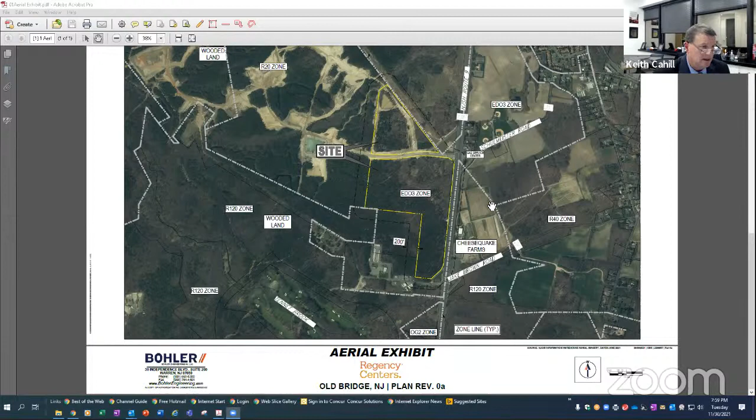To the east of our site is Route 9, and some additional vacant lands further to the east. In general, if I zoom in a little bit, you can see the site is currently vacant. It's treed with mostly evergreen trees.

Just to give you some characteristics of the site itself, the portion we're calling phase 1 is known as block 7101, lot 1, and it's 48.55 acres. This piece of property has approximately 2,200 linear feet of frontage along Route 9 -- 2,200 linear feet, close to a half a mile. We have approximately 1,500 feet of frontage along Schulmeister Road.

And farther to the south, there's actually lands owned by the Board of Ed that buffer Jake Brown Road, but we have an access easement through that land to allow access out to Jake Brown Road. That frontage along Jake Brown Road is approximately 250 feet.

You may be familiar with, there's a jug handle at Jake Brown Road, as well as a jug handle at Schulmeister Road. The last piece of information I'll provide is that we do have wetlands that have been delineated on site. We have a current LOI as of December 2020, so we're in current standing with that.

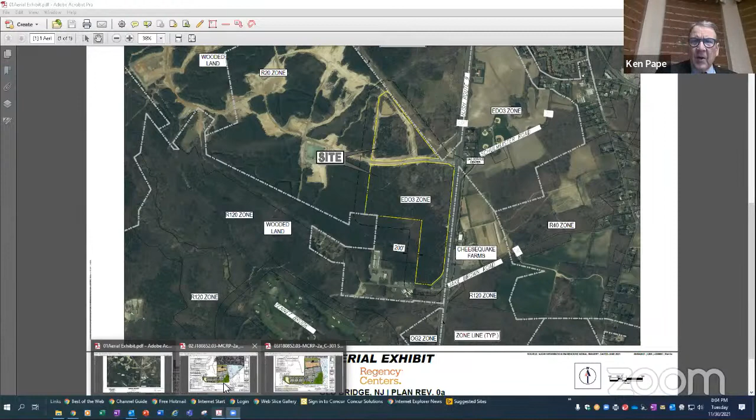Mr. Cahill, I think that was you've located the property and identified the surrounding uses. Could we go to the overall site plan and do an executive overview of the proposed development?

Absolutely. And just as I get into this, I want to let you know your professionals have looked at our drawings. We've had an enormous amount of cooperation in terms of communication back and forth, and they have generated review letters that we've had a chance to review and have some dialogue back and forth. So my presentation, I hope to pick up some of those sound bites. It is a lengthy letter. This is a very large project, but I really am not concerned with any of the comments being too significant that'll have drastic changes to what is in front of this board this evening.

Along those notes, I want to point out on the DEP side, we also have an NJDOT permit that was executed way back when. The improvements related to Schulmeister Road, a right-in, right-out driveway along Route 9, the jug handles along Schulmeister's have been constructed. So not only do we have the permit, but we also actually have constructed the improvements for this development that we're a part of. As I mentioned, the overall approval of Oaks is a part of that.

In addition to that, Middlesex County, we have filed an application. It's pending. We got news today they just need a check and they're going to issue their permit, which is great news. And in line with the soil erosion, Freehold Soil Erosion Conservation District, we have their permit in hand. And lastly, in terms of the Old Bridge MUA, we have sent our drawings in and we have preliminary intensive approvals for both water and sewer as part of this project.

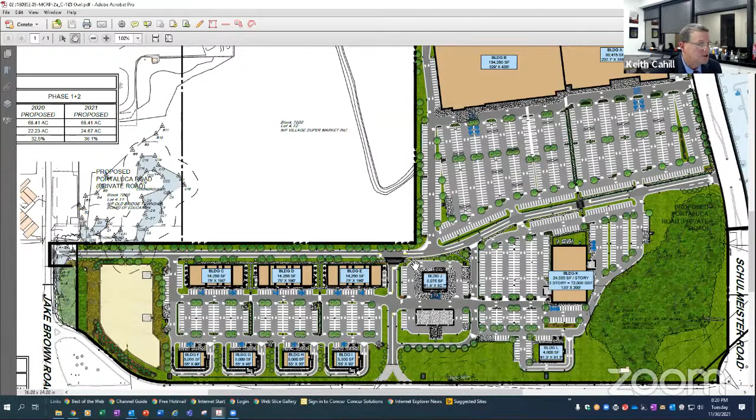Those are raised crosswalks as calming devices, with signage and stopping for pedestrians to get across. You can envision an office environment wanting to get to the grocery store to eat, to the convenience store, or continue across to our shops or other potential fast food. We have a direct access point across our parking lot heading due south from Building K across to the convenience store with gas. We have sidewalks crossing and circulating into the front of the site from and behind our shop buildings, with raised crosswalks again.

There have been additional comments from your professionals with great ideas, adding some more sidewalks and a couple more calming devices for crosswalks. We've had crosswalks connecting buildings C, D, and E down to the pad sites F, G, and H, adding some raised crosswalks there for calming devices, which we agree with. Our intent here is to create an environment that's inviting and circulates safely and efficiently for cars as well as pedestrians for the multiple mixed uses.

In regards to a couple other key components that may be overlooked, because it factors into some of the variances we'd be requesting—you'll notice, as I discussed with our stormwater management and drainage before, the big green areas water runs to now. We're going to allow a little bit to go there, but we have two main stormwater management features.

We have Basin 1 down by Jake Brown Road, which is an infiltration sand basin. This has been reviewed by the DEP and their professionals, meets the DEP's requirements for providing water quality for the entire site, as well as meeting its recharge component. You'll also notice to the rear, or west, of our grocer and Building B retailer, we have another large stormwater detention basin. This is hydraulically connected to Basin 1.

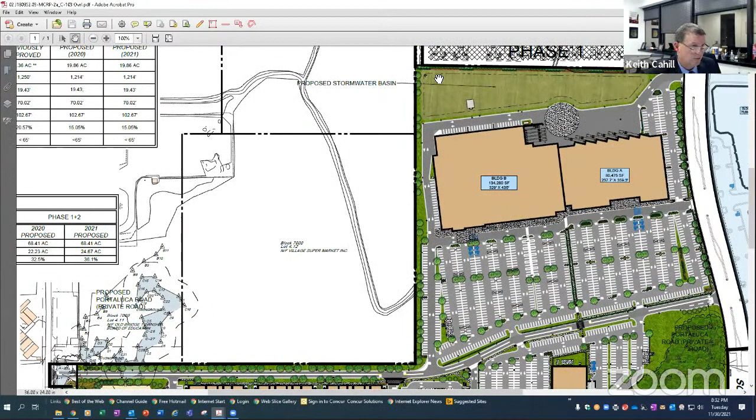We've also added shade trees along our roadways to improve appearances. To give you some numbers on the proposed landscaping: 264 shade trees across 7 species, 51 ornamental trees across 3 species, 178 evergreens mostly along that buffer area across 4 species, and 436 deciduous shrubs across 5 species.

We also have evergreen shrubs, 1,743 throughout our site along the parking lots and parking areas, 1,180 ground cover plants across 3 species, 1,810 perennials throughout the site, and 212 ornamental grasses to fill in and replace what's there. I want to point out these detention basins have certain maintenance requirements and can be difficult, with some slopes along them, but with all that said, we're proposing 5,874 new landscape plant materials throughout this site.

5,874 plantings, 34 different species, including trees, shrubs, and plants throughout the site. I think we've done a very tasteful job.

We do have some waivers that your professionals have pointed out. I'll point out, due to spatial areas along Schulmeister, again along the 10-foot area, right at our driveway, created waivers. They were previously granted or at least contemplated because we did not get any closer to Schulmeister, we did not get any closer to the residents, we're only getting further. So the waivers associated with that, we're going to respectfully be requesting.

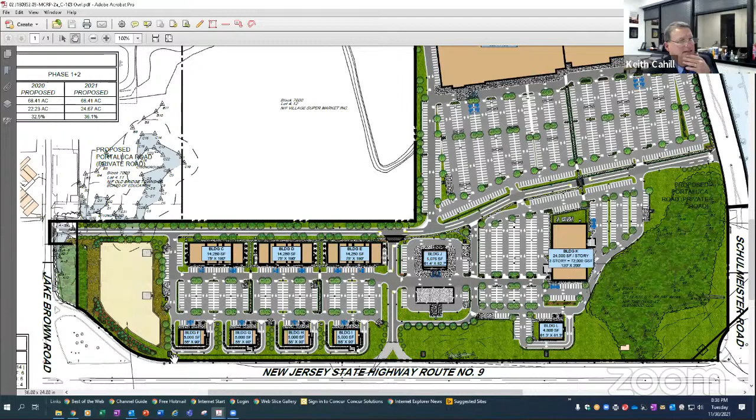The last 2 monument signs are located along Schulmeister. Because we are a corner lot, we are allowed to have a primary sign and a secondary sign. So we have one at the intersection of Portaluca. This sign is in the same character, materials, and look as the other signs, the same height, 15'6", and the same area as the secondary signs, 167 square feet.

The second sign on Schulmeister is just prior to, or to the east of, the entrance in front of the ShopRite. That sign, again, is the same size as those other secondary signs.

The only delta here is that it isn't set back 20 feet from the roadway, it's set back about 13, and that's because it's in an island that is smaller than what we have down by Portaluca. So it's not any closer, and the feel for it would be fine. I think it provides visibility to the traveling public to access the site in the appropriate locations so that our circulation operates safely and efficiently. With all that being said, I think the only other thing I haven't mentioned is lighting.

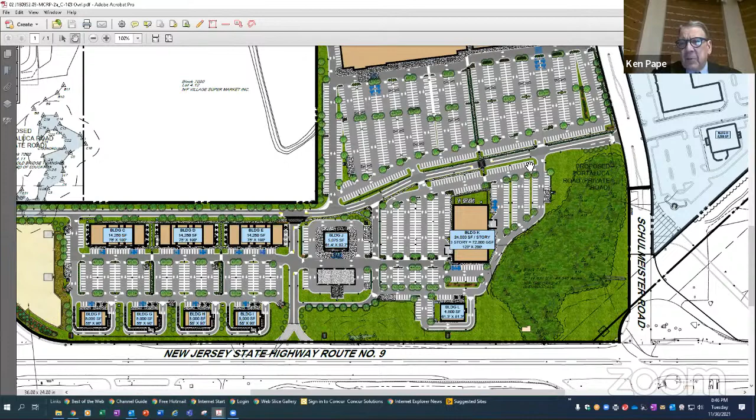I think although Henry Ney will come with considerable more depth on the presentation, I think it's important to point out how the parking standards have changed over the past 15 plus years, but that the ITE standards, which seem to be more current and more real, were applied in the staff's analysis. I would ask if you could comment on that, and if you could join with them in saying your opinion that the ITE standards are the appropriate standards for the board to be considering this evening.

Certainly. And I'll tell you, in regards to that, if you refer to page 12, item 3 from your professionals' review letter, there's probably a page and a half, almost 2 pages of information on this, if not more. And the key there, as I mentioned, following the prior approval of 5 per 1,000, that's what we came in with. The concern of the use of a medical office building needing a higher demand of 1 space per 150 square feet generated a higher number of parking stalls.

And what I'll say again, a fast food use, half of these buildings up along Route 9 in terms of square footage would be designated as a tenant as fast food. The criteria from the ordinance of 1983 was 1 space for 30 square feet, which is, with all due respect, an archaic evaluation today when it comes to what percentage of people go through drive-throughs for fast food versus using it.

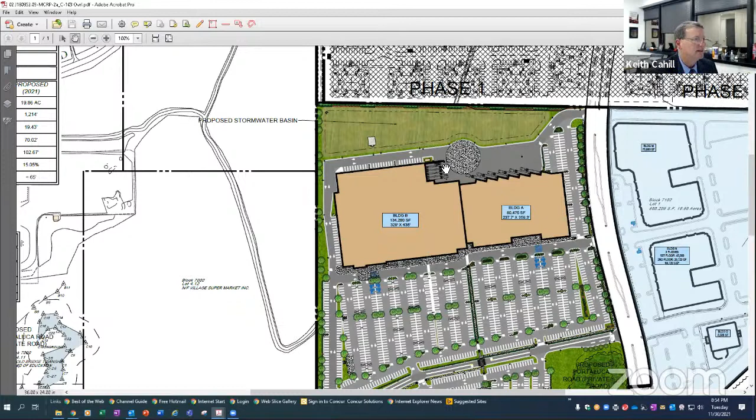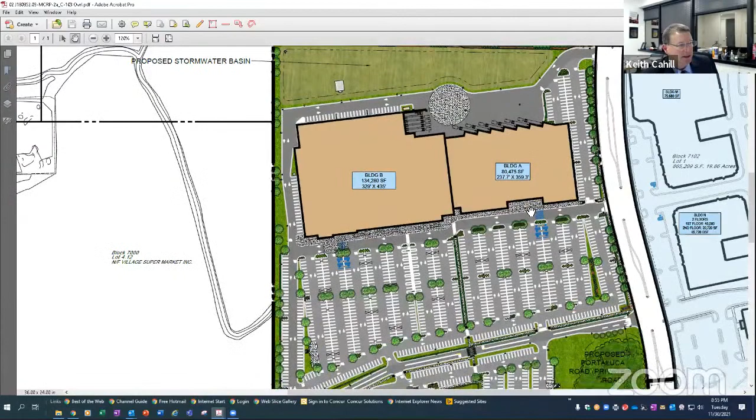In terms of deliveries, you'll see we spent a lot of time laying this out. I'll zoom in a little bit further here to show how this operates. You can see we have turn lanes to allow our trucks to come into the back. This gray area is a concrete turnaround. Our intention is to have all of our trucks delivering to buildings A and B come in off of Schulmeister, enter our driveway closest to the west, circulate here, load, unload, exit the same driveway back to Route 9. There's no need to go anywhere else. Under redundancy, you'll notice we have designed larger radii in our parking lot in an area that could get us out to Route 9 through our right in, right out driveway.

It's our intention that it's redundant, period, end of story. If there is a problem or something wrong with Portaluca for whatever reason, and you have tractor trailers coming on a schedule, you have a backup plan. But the operation is going to take it off of Schulmeister into the back of the site, back to Schulmeister, back to Route 9, traffic signal controlled, a perfect scenario with turn lanes available. The number of trucks for the grocery, including frozen and other vehicles that would use the loading areas back there, up to 38 per day could possibly be back there. You'll notice we have 6 loading zones in the back, spreading that over the time.

Again, not a concern with the numbers. Adding to the 5 loading spaces in the back of building B, a retail facility typically has less because the grocery store has a higher number. At most on the retail side, there's also smaller trucks that may come in and out of the back, 18 per day. I spread that over the hours of operation, and even some outside of those hours. Not a concern.

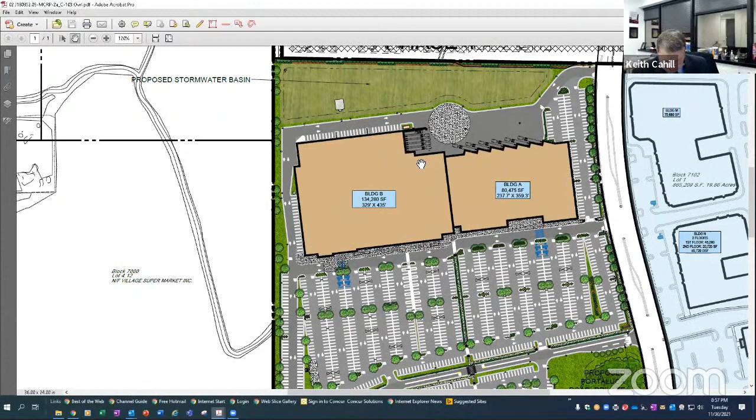In regards to trash, there's trash in the back as well. The compactors are picked up typically 2 to 3 times a day. There's balers for the cardboard for the bigger retail, picked up 2 to 3 times a week. All of that operation is pulled away from the residents, using an in and out system that works, with a backup plan if necessary. I think it operates very well as proposed.

In terms of the operations of the medical office building, building K, hours of operation are 7 a.m. to 7 p.m. Monday through Friday. They sometimes go into Saturday and Sunday, 9 a.m. to 2 p.m., with less people and appointments. Typically during the week at peak, 150 employees, and they have a turnover of visitors where they could see up to about 70 people in a 2-hour window over the course of their operating hours. A high percentage of visitors are scheduled appointments.

If you do all that math, having over 370 odd spaces in this area, there's no concern in terms of having the employees there. Even with an overlap of 70 plus 70, we still have a surplus. I think that works very well.

I will admit I did a very poor job showing the service area for this building, and I take full blame for that. The pads along the west side of the building have 3 things there. This building does need an emergency generator. It has trash collection, a transformer, and a service area.

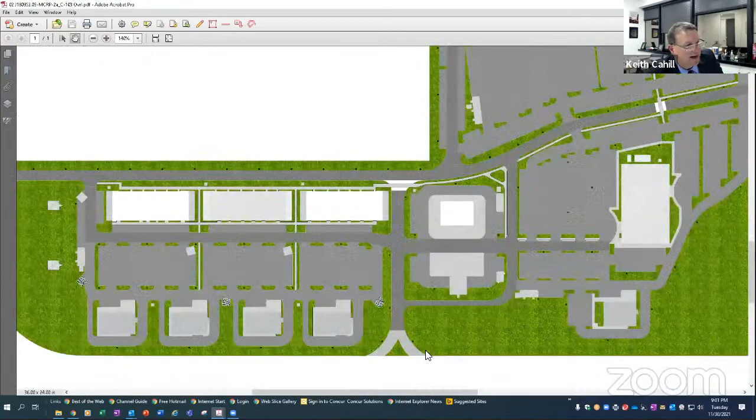As I mentioned, the drive aisles are more than adequate. We have a right-in, right-out driveway immediately off of Route 9. We're anticipating a fuel delivery pulling in and circulating around at a minimum of once a day. They will offload on the right-hand side. The dimensions between the islands are 30 feet, the dispensers 30 feet. All of that operates with clear lines for cars to operate, and when the tractor trailer is fueling, it does not inhibit operations at all.

There are adequate safe distances between the canopy and the store itself. Again, cars being able to pull out, no problem.

The delivery vehicles for a facility like this go to the rear masonry enclosure, which has a dumpster and a shed housing equipment that keeps the yard clean, as well as a compactor. You'll see loading zones on either side. Smaller vehicles can come in off the right side to pick up from the compactor or trash. On the left, or south side, that loading zone is adequate enough, with a 24-foot drive aisle and 15-foot lane for loading.

Store deliveries, between soda, milk, and dairy, typical grocery stuff coming in and out, run 1 to 2 per day for the store itself, up to 15 a week. They also take anywhere up to 24 in a week's period, 5 days a week, coming in and out of the front of the store with smaller box trucks and things of that nature. Again, no concern with these dimensions, it's industry standard for this type of operation. No concerns with loading, no concerns with trash.

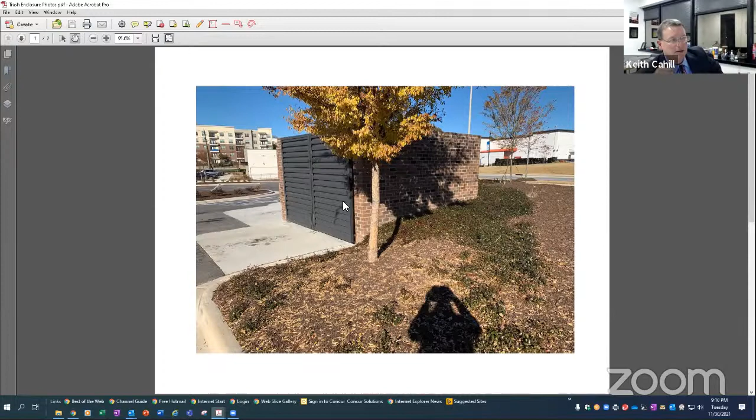Ken, can you confirm you see that? Yes. Okay, so this is the Raleigh facility, in the parking lot with landscaping around it. You can see it's made of brick material and the doors are closed with a metal closure. They're only opened when the trash truck comes, because they've built in man doors that allow access, typically in the rear, so it won't be a problem operating and won't be seen.

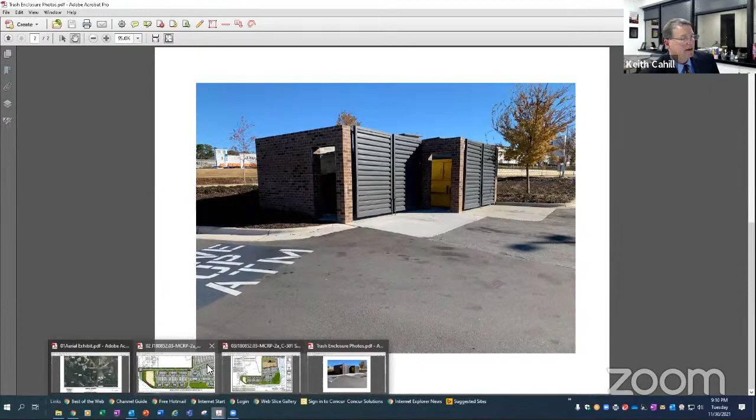Look at the height, in excess of 8 feet. I did not have this detail shown on my site plans—I apologize to your professionals and the board. I will make sure this detail is shown, but this is how Regency and our office feel we've planned this development out in a way that will function and be aesthetically pleasing, serving the needs of its tenants, its customers, and Old Bridge.

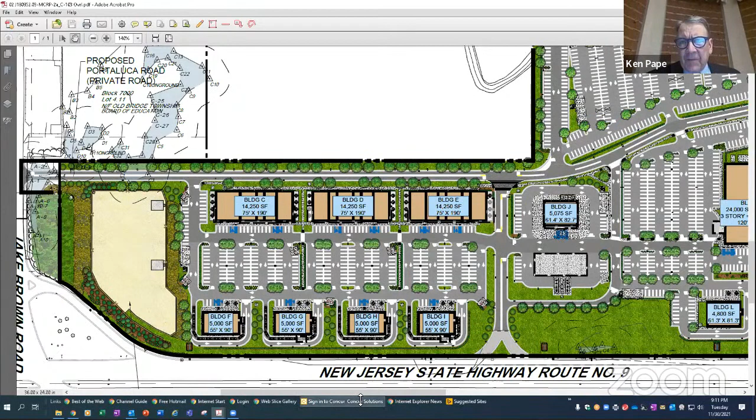Keith, I think we're coming to a conclusion of a portion of your testimony. You described the variance relief required for parking and for freestanding signs. You did not provide planner's testimony in support of those variances—you identified them empirically and gave your engineer's perspective on why they were appropriate. I want to say to the board members and board professionals that Mr. Cahill's responsibility regarding variances is to describe them accurately, put the empirical data before you, and share his engineer's perspective. We recognize there's planning testimony that goes with that, and that will come at a later hour.

I'm going to look to you, Mr. Cahill. Have we reached the point where it's appropriate to indicate that we have the reports and that you're familiar with them and prepared to address those comments? Or is there any further direct substantive testimony you'd like to place on the record before we go there?

To the point you mentioned, I need to point out the variances. Just as identified in the reports, which I agree with, in addition to the parking space number, there is a requirement to have an island when 20 plus stalls are in a row. We do have a few areas in the parking field, I'm pointing to a couple of them, where we exceed that. We are respectfully requesting that variance.

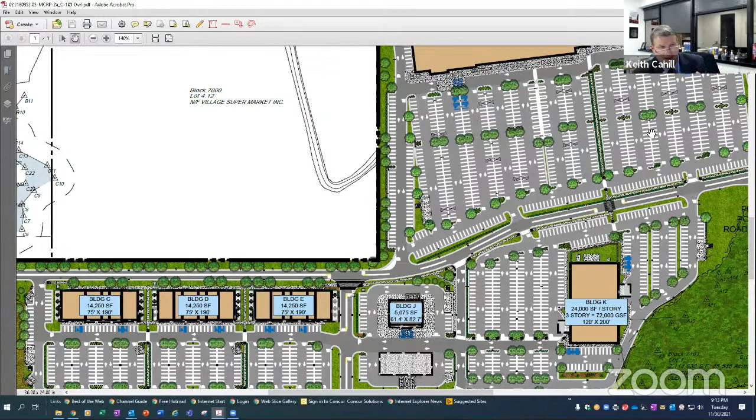There's a requirement to have a 5-foot radius on all curbing. There are some islands throughout the parking lots because of the circuitous angles and locations that deviate under that. Again, in my opinion, I'm just pointing them out. I'm not concerned from a safety or design standpoint. It functions well, I'm not creating tripping hazards. I'm just trying to provide islands that may be in an area with some unique shapes due to the angles there.

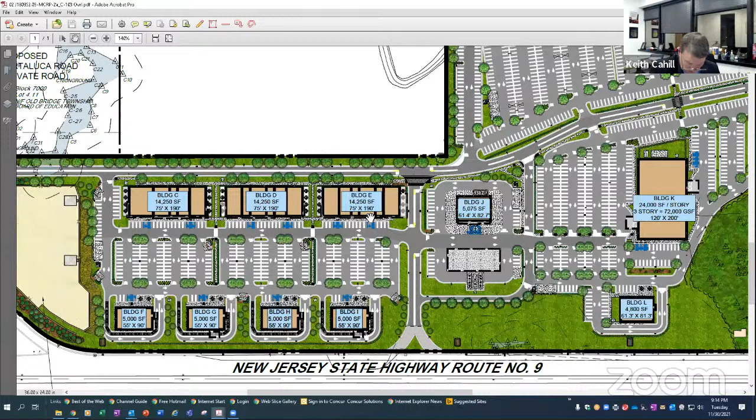And lastly, for the loading requirements, you do have a requirement to have it for each building. You just heard me - I hope it wasn't a rant, but I realized when I was speaking a long time, I probably was ranting. Building C, D, and E technically do not have loading zones where 2 would be required per building. F, G, H, and I did not stripe one either, though they have one that will operate and function like one. I do need a variance in that area because I'm not meeting the number per that building.

It was located, it was commented in the letter that the convenience with gas didn't have a loading zone, but I believe it does. It meets the ordinance, so it does not require one.

Building K, again, I'm going to reserve the right to, when I correct the drawing, see if it meets the definition with your professionals for it to be a loading zone, but there is a service area that meets the needs of that building. So if it's determined it's a variance, I will respectfully request that.

And then again, building L. I believe I've identified all of the variances requested between parking numbers. I identified, I believe, also the signage variances related to the freestanding monument ID signs. I reserve the right that your architect will discuss the building signage - God bless him, he can spend, they're beautiful, but there's a lot of it to discuss. I think that covers the items as required, because the waivers I mentioned for landscaping, I believe I mentioned them all, and our planner will provide the justifications for each one.

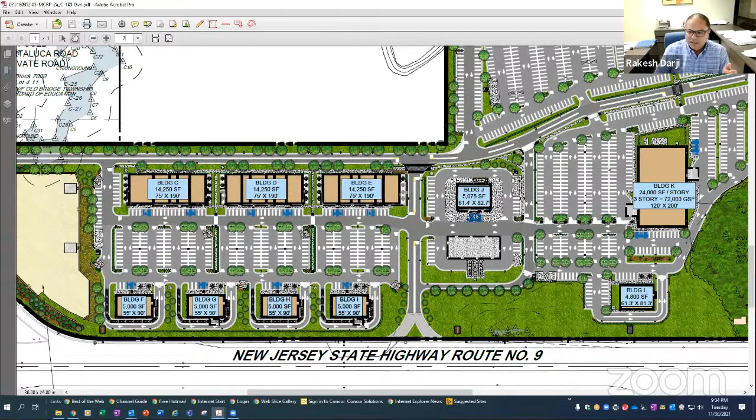One of the questions that we had in our letter, and I'm sort of skipping through - Keith, if you can zoom out a little bit - there's a square shaped property that currently is noted as belonging to Village Supermarkets, which is a future commercial site. And what we requested is that the access to that site be dealt with or accommodated in some way, or at least some discussion be had as far as how the applicant proposes to integrate that site into this development.

Sure, great. Yeah, and that comment was in here and it's on my list, Ken, that I didn't hit. So, yeah, I think the challenge that we have, providing cross access between the sites is not a concern of our client. Locating it today without knowing what's going on that property is tough to do. There's obviously grade change today, there's access points that may make more sense. So could we cover it with, we agree to provide cross-access easement when we see what is being developed next door? Or somehow, I'll let the lawyers figure that one out, but I don't want to say right here we're going to put 15, 20 foot, and then whatever goes on the other side, it makes no sense to put it there, right? So... Yeah, I can appreciate that, and I can also appreciate kicking it to the lawyers too.

So really, I guess what we would be looking for, and again, I'll ask Veena for her input as well, is that should the board act favorably on this application, that there be a condition that the applicant would work with the future developer of that property to integrate that site in with this development.

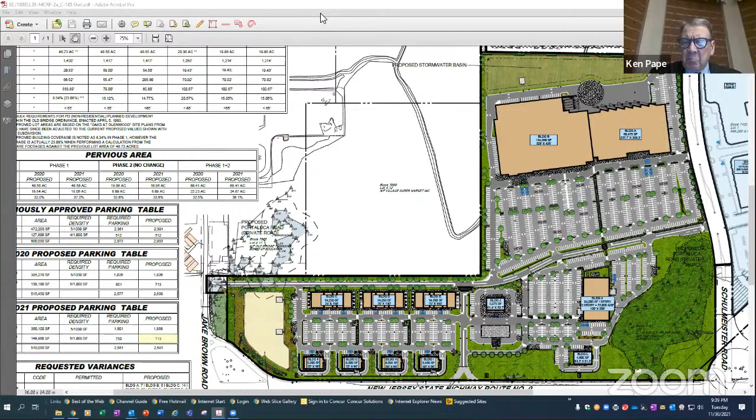So yes, we're aware that that language appears in the developer's agreement. There are some qualifying elements in the actual developer's agreement. I had the opportunity today to talk with the township attorney and Veena about alternative ways of addressing that. We did not reach a conclusion, other than to make a commitment that during the next week we'll engage in dialogue with the township to see if we can come up with something that's mutually agreeable. I think that would be the appropriate place to stop this evening.

We're going to work very hard to make an alternative work. Thank you. So along that same vein, one of the things we discussed with the applicant and their professionals was the existing New Jersey Transit bus stop at the corner of Schulmeister and Route 9. One of the things we're asking is that as part of this application, the applicant work to construct a sidewalk going out to that bus stop that would serve this development and also serve folks who may be walking down Schulmeister to the bus stop.

So we do want to cooperate. We more than want to cooperate. We can't make promises on lands that we do not own or control, but we can make promises to provide the funding for the sidewalk, and where we can install it, we'll install it. We like the idea just as much as you do. We just have to work it out. So we're in agreement that a sidewalk would be beneficial in that area. We just have the legal and ownership issues that we've got to work out.

So I think, correct me if I'm speaking out of turn, but I think that's something we can discuss between now and the next meeting as well, to get a little bit more clarity on what that's going to look like. Yep, we're fine with that.

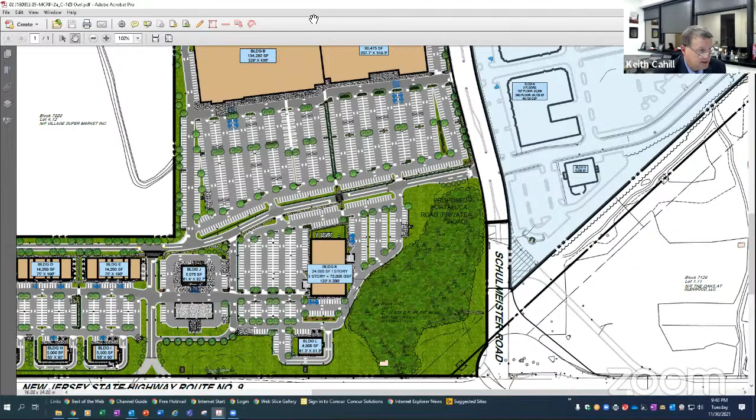Rakesh and Veena, you had mentioned, and I put some testimony on additional sidewalk to get across from Building K, the medical office building, toward and connecting the pad sites F, G, H, and I. You also mentioned some calming devices for crosswalks in that parking lot, and using a treatment for a calming device at the intersection off the right-in, right-out off Route 9 prior to getting up to Portaluca. We're in agreement on that.

And in the same vein, you asked for bike racks located throughout the site. Again, they're easy things that make sense to do, so I want to do that. We did point out we didn't want that sidewalk coming along the one-way road, and I think we all agreed on how we got there, so we do it in the safest location to cross the street. I just want to make sure we're all on the same page, and I can have an exhibit prior to the next meeting to show that if needed.

Veena, I forgot to mention one other thing you brought up, and it relates to signage. You pointed out that on the drive-through uses, when we show drive-through ordering points and directional signs, I thought they were covered under directional signs and no variance would ever be required. You mentioned it could require a variance, and I wanted to let you know, prior to the next meeting, I want to show that so that if it does require a variance in your opinion, I want to ask for it rather than finding out down the road.

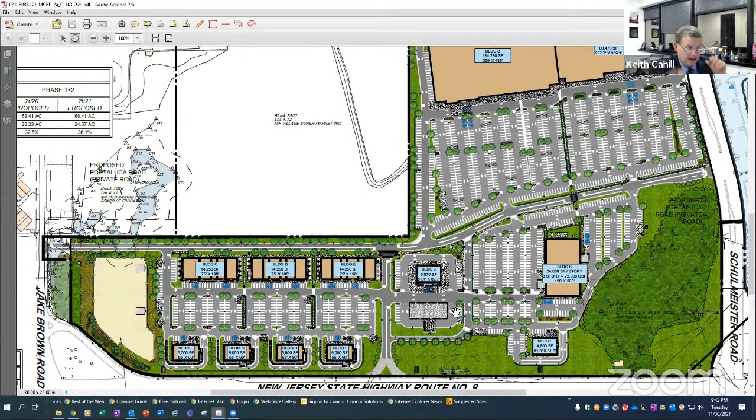And lastly, in the same vein, you mentioned we did not show any signage on the fueling canopy. I want to add that too. If it does require a variance, then I want to ask for that, but I know right now it's not shown. Again, I would show you that prior to the next meeting, so you have time to review it, determine it, and let that be known to the board, whether you're in agreement with it or not.

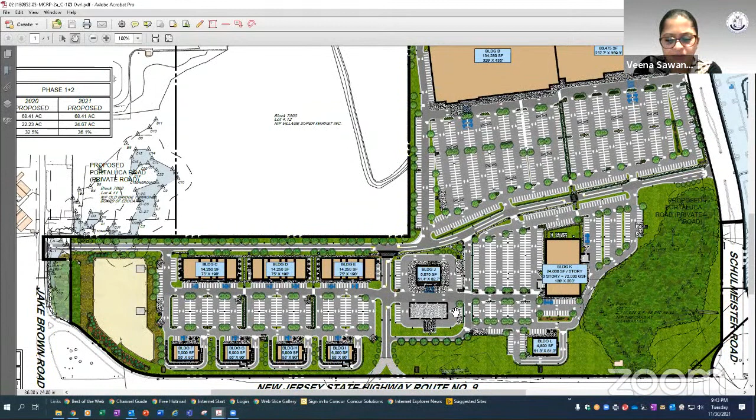Sure. Just to add on to that, board members, there was a lot of discussion between Keith, Rakesh, and myself about pedestrian circulation within the site. We had asked the applicant to add additional sidewalks, especially the connectivity between the parking lot for the medical office and the retail spaces, which is quintessential, because medical office buildings typically close at 5 o'clock or may not be open on weekends.

Now when we talk about shared parking -- and we didn't even get into the whole shared parking concept -- every user or retail use has a different peak time. Retail parking spaces within the complex are mostly used during evening time; that's their peak time, whereas the medical office building is closed then. So the parking required by the medical office frees up during evening hours. If the restaurants or fast food restaurants or the retail development get busier, people will be able to park where the medical office building is. So it's quite important that there's safe pedestrian connection between these uses.

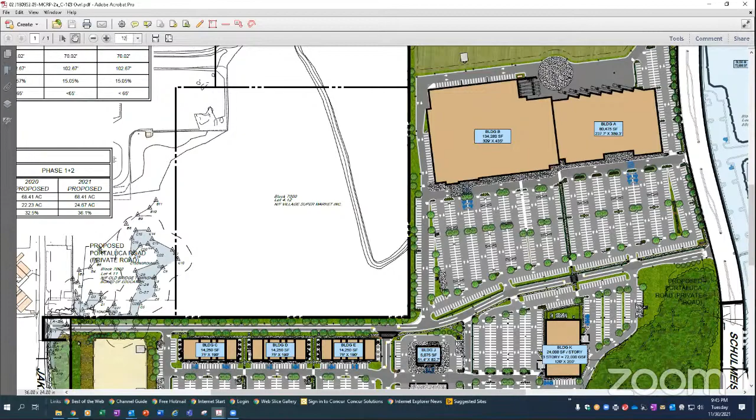So the overall development, the entire Oaks development, is a mixed-use development with residential and commercial, residential being on the rear portion. Sorry, I'm going the wrong way. So I think it's important that there is proper connectivity, and it's a multimodal connectivity.

It's not just pedestrians -- even people during summertime, I would love to bike to the retail store, I would love to bike to the restaurant. So I discussed that maybe that's something they should look at. Between today and the next meeting, Keith has agreed to work with Rakesh and me to find solutions for how we can add that connectivity. They have agreed to add bike racks at multiple locations throughout the development. So those are changes you will notice.

With fast food drive-through restaurants, I've found that the majority of township ordinances do not cover menu board signs, and typically when a fast food restaurant comes in, they have to request a variance for those menu board signs. So I asked Keith to look at some fast food restaurants and what their requirements would be in terms of menu board signs, and request those variances at this point. Obviously he needs more time to research, evaluate, and come up with a proposal. We will work with him, review the signage in advance of the next meeting, so that the necessary variances can be added.

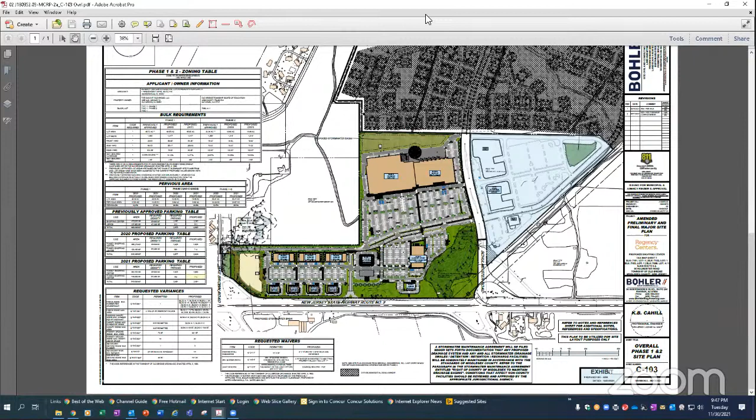Keith, you can go on. Is there anything else that stuck out? Rakesh, do you have anything else? I don't have anything else at this time, Mr. Chairman. Okay, anything from any of the other board professionals before I hand it over to the board members?

Mr. Chairman, we have the fire chief tonight, and we have our forester as well. In addition, I also have Alex Meitzler from Traffic Planning and Design, who's our traffic consultant, online. So I'll ask Alex if he has anything to add at this time.

Okay, in regard to Mr. Cahill's testimony. The applicant's traffic consultant is also going to testify, and I imagine Alex will have some input at that time as well, related to the on-site circulation items. Rakesh, I think you and Veena already hit the items we had discussed earlier this week regarding Mr. Cahill's testimony. Great, thank you.

Okay, any other board professionals regarding Mr. Cahill's testimony? If not, I will hand it over for any questions from the board members themselves.

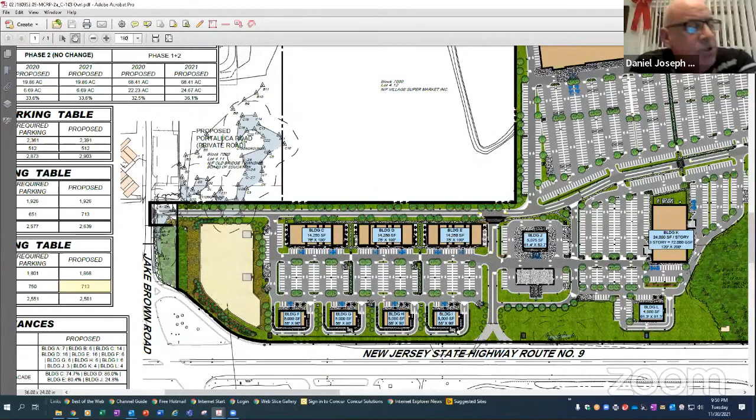If we go towards building G and zoom in, we can see the relationship of building G, the entrance to the drive-through, and the relationship to the adjacent parking directly across from it. From an observation standpoint, it appears to me that if there was a 20-foot adjustment taking the cluster of buildings F through I and moving those four structures south 20 feet, you would then have the ability to directly align with the interconnecting pathway between the parking.

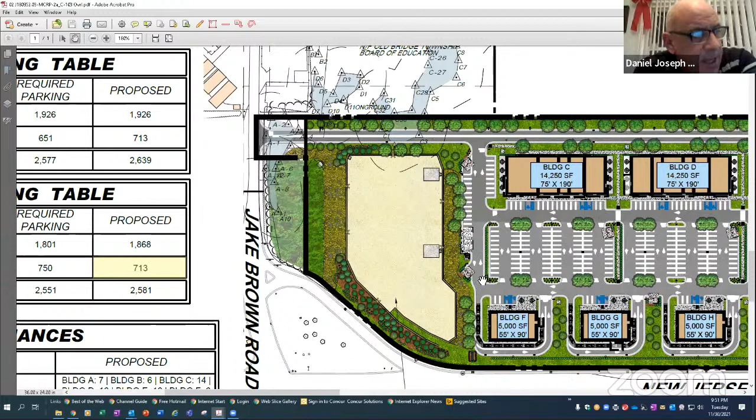What's occurring right now is if you drive down off of 9, you come in, you make the left. If you want to go to building G, you would follow down, turn down, make a left down that parking stall lane. Then to be able to enter, if you took that path, you'd have to make an odd move to get into that drive-through entrance. But if you could envision adjusting it 20 feet south, it would directly align and reduce odd maneuvers for vehicles when they enter or exit.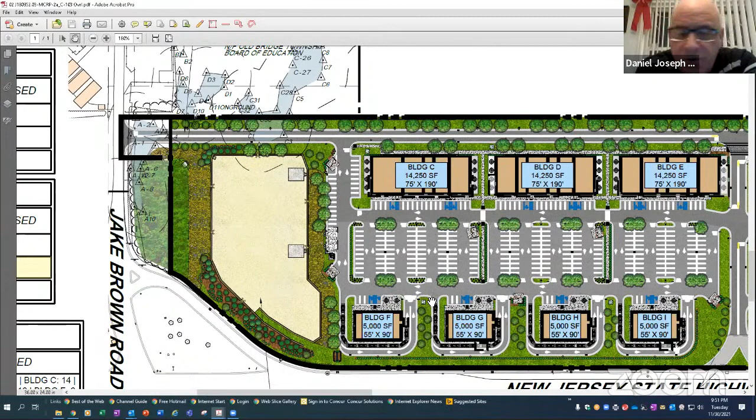I know the intent is when they exit any of these facilities, they would make the right and follow the pathway, make the left, then make another right to exit back onto 9. But the likelihood is that will not occur, and they'll try to get into that second lane to then make the right and leave. So the observation is, unless there's something prohibiting the adjustment 20 feet to the south for the entire cluster, I think it's something you may want to look into. That's one. Second item is, Mr. Renner, can I just address that really quick?

I just have a quick question to bring up a point. But is that traffic pattern discouraging people from driving between those parking lanes and possibly creating accidents with people backing out? Is it encouraging people to loop around specifically to get to those fast food restaurants?

I think that's where the whole discussion comes from right now - what is the likeliness to occur? Anyone going to building G or building H is more tended to drive straight out if possible, then make the right in front of building D to get back, instead of going around the outside. So it may be designed for traffic flow to circulate around the perimeter, but it's more likely vehicles will try to go straight. Right now they can't go straight because they'd hit the barrier for the parking stalls, so more than likely they'll make a slight move into an oncoming traffic lane to enter the drive-through.

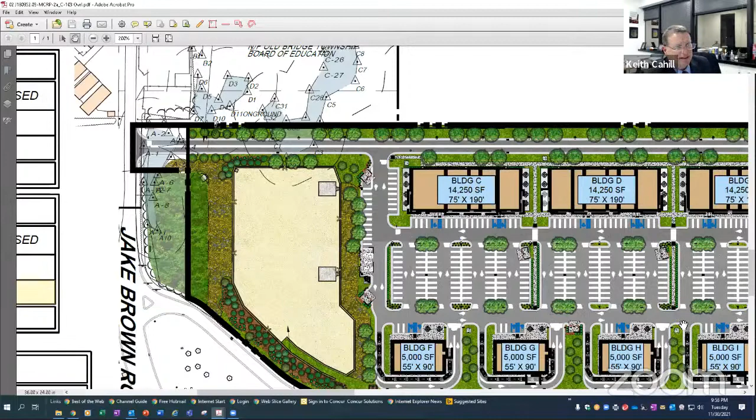Just so we're clear, because moving this is pretty close to alignment - but either way, I got you, we'll take that design just so we're on the same page. We'll take that back and see what we can do to improve that.

Okay, thank you, Mr. Cahill. Mr. Renner, anything else? Thank you. That's all, Mr. Chairman. Okay, sir, thank you, that's it. Do any of the other board members have any questions? I do.

Okay, Mr. Pinck, how are you? Okay, I just have one or two questions.

Are the roads one-way or two-way within the facility? Which roads? Any of the roads you can drive on. Yeah, I see a lot of them are noted with arrows. They're all two-way with the exception of two areas I pointed out. The loops behind the pad sites are one-way circulation in a counterclockwise direction, so the drive-through operates. The only other one-way area is entrance only on this driveway I'm highlighting, closest to the right off of Route 9.

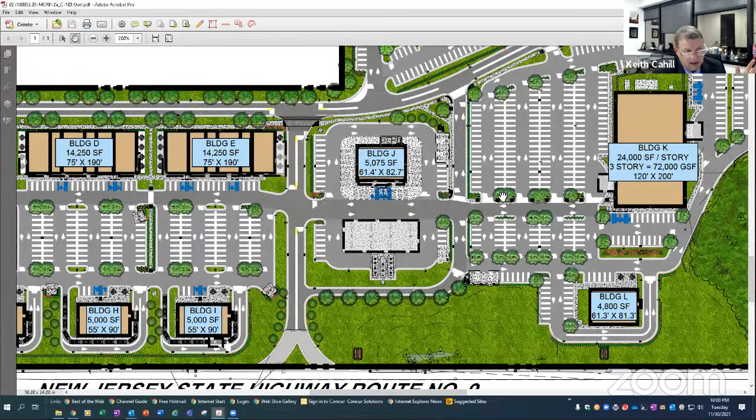The reasoning is, A, we don't want cars exiting here too close to cars coming in, but entering here provides an option for people going to building K who don't need to come up to this intersection or cut through the convenience store with gas. They can bypass that and come straight off the highway. I compare it to a shopping center in my town where they provide an extra cut-in for the Wegmans instead of going through the main spot and circulating through multiple intersections. This spot operates differently given the number of employees and visitors during the day, so you can shortcut it.

This is the one-way in, and then it becomes a two-way aisle. Everywhere else is essentially a two-way aisle.

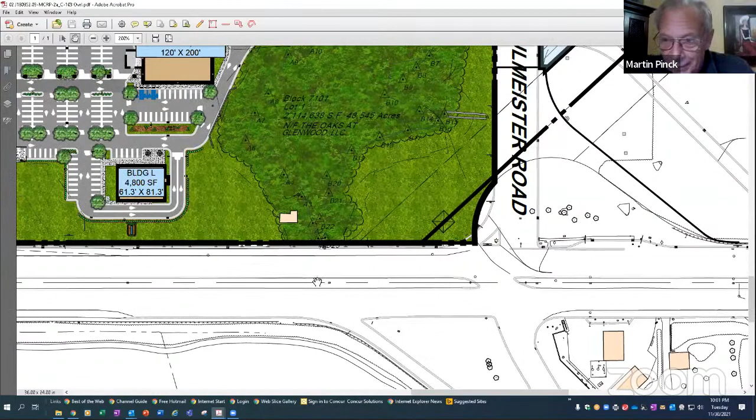Based on what you're saying, is there any limit on the size of trucks coming in? Or is there a separate truck entrance, and if so, is there a size limit you must be over to use it? Also, what about double parking on the main streets? Even though cars aren't parked there, with trucks stopping for a couple minutes, is there enough room for someone to go around them, or will that build up more traffic trying to get past these double-parked trucks?

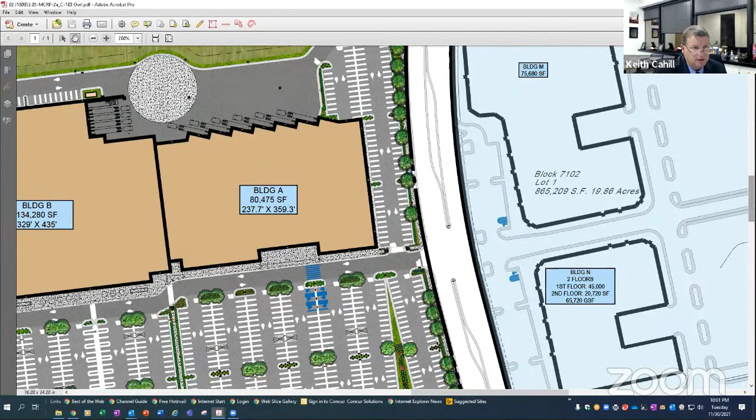So let me make sure I understand clearly - I apologize if I didn't make it clear. The size of vehicles delivering to building A and building B, the grocer and retail facility, are typically WB67s, the largest vehicle along the road. It's designed to come in and out of this driveway, and there's adequate space for those movements to occur.

But that's going into the driveway - what about getting to the driveway? They're riding on the main roads of the development. They have to get to that back area unless there's a separate entrance just for trucks over a certain size going to the back.

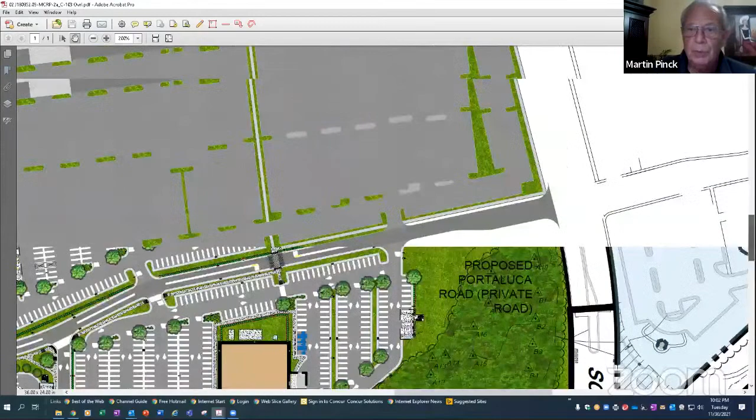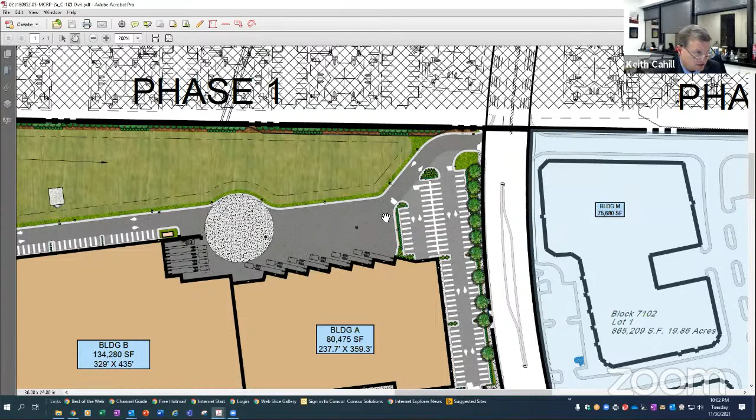Schulmeister Road comes off of Route 9. Tractor trailers can utilize Route 9, come down Schulmeister, and use a left turn lane to get into the service area in the back. There are recommendations to put up signage - truck entrance, employees only - and we agree with that. But this is where the deliveries, the largest vehicles on this shopping center, the WB67s, will enter and exit and get back to Route 9.

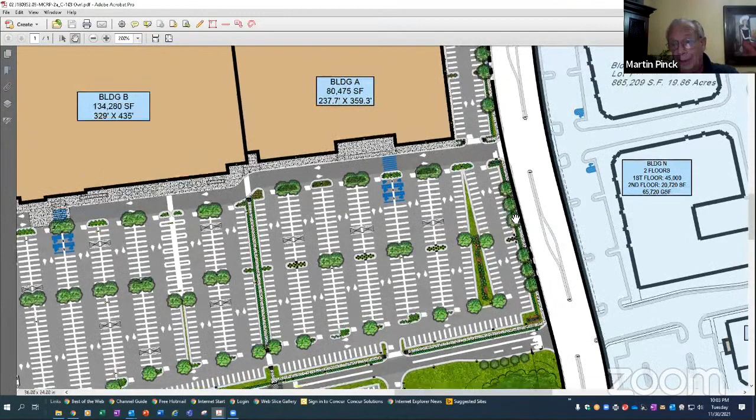How wide is Schulmeister? Going back to Route 9, they're going to be riding on one of what I consider the smaller roads. What's the smaller road, Schulmeister? How wide? I'm not saying it's the smallest road, but it is bigger, and if they have to get over to the left lane when coming out, it's not the most convenient thing. That's what I was wondering about - making trucks one-way possibly. I'd say traffic may flow better.

I respectfully disagree that we're coming off the major highway on the widest road with access to our shopping center, which has a designed driveway to come in one spot and exit that spot - hence the turnaround. I believe to separate truck traffic, we're using the widest road, the safest area for these vehicles, keeping it away from other options within this center.

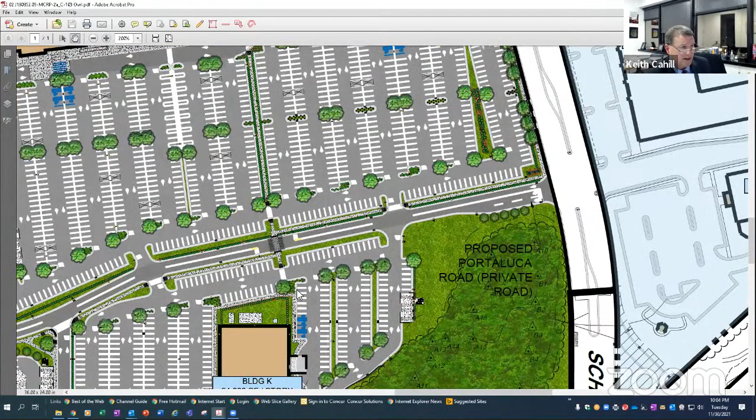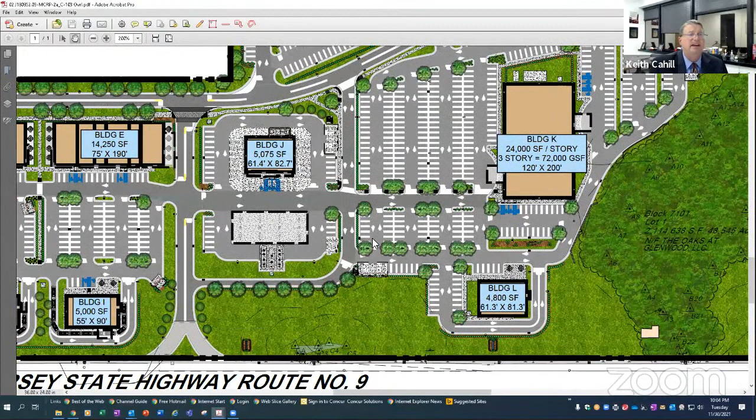Otherwise, anywhere else, Portaluca is a 24-foot wide curb to curb. I do not want them going down there. I agree with you on that. There's no other option to bring that size vehicle in, and I believe it's the safest route possible. Mr. Cahill, how wide is Schulmeister?

It's 80 feet. Okay, that's sufficient. And take into account the island on either side, so you're looking probably 30 feet on each side? Yeah, you have 2 lanes of travel and a center turn lane, so you got the space. I think it's an 80-foot right of way, and the travel lane's like 78 feet or so. There's very little extra space there, but it's all utilized for the travel lanes. Sometimes it's hard to envision how wide the road actually is when you're looking at a drawing, but understood.

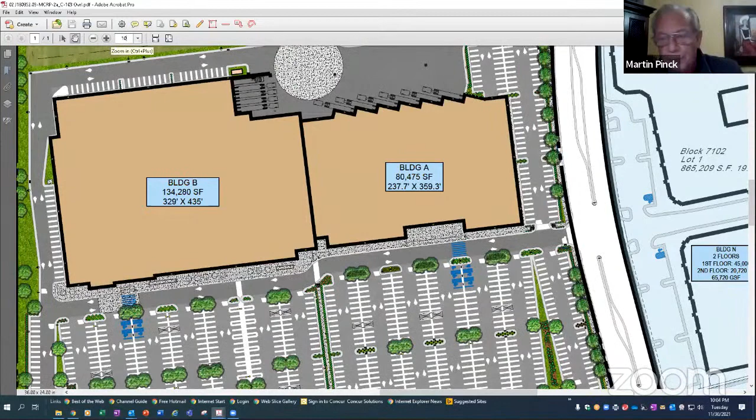I thank you for your help. I have one other question. Are there going to be, within the driving area of the roads, stop signs or lights or anything like that? There's no traffic signals proposed. There's stop controls at all of the major intersections and points appropriately located for safety relative to the roadway network. We also have, where we have pedestrian crossings, raised crosswalks proposed to act as traffic calming devices for the traffic circulating through the site.

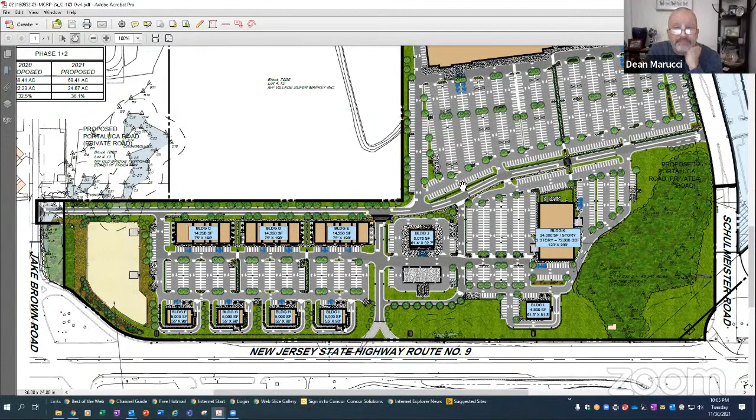Okay, thank you, Mr. Pinck. Anyone else from the board? Okay, so Dean, I have a question.

Mr. Lennon: Would the police department have Title 39 for the roadways? Mr. Lenny: We have no issue requesting Title 39 be enforced on the property so that we have the benefit of the police for traffic control. Typically as part of these approvals, we recommend that the applicant grant Title 39 authority to the township. Great question, Casey. Thank you.

All right, anybody else? Okay, Mr. Pape, where do we want to go from here? Who's your next witness? The next witness is Frankie Campione, who is our architect, and with your permission we'll bring him in. Absolutely, thank you.

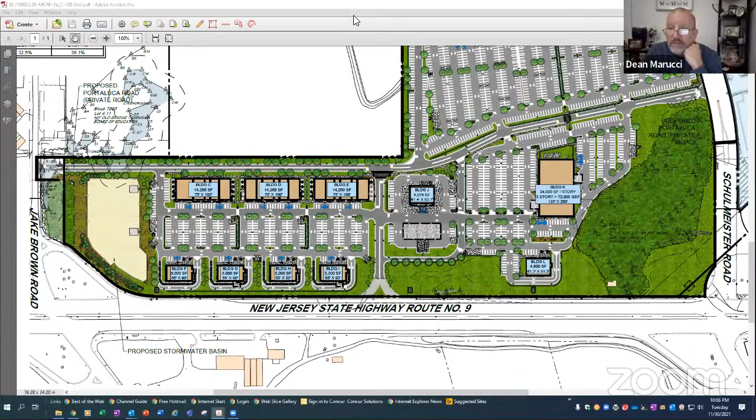Very good, thank you. So I don't see Frankie in my screen. Maybe, Mr. Chairman, just for clarification purposes, since we did go through all the questioning of the witness, do we want to officially open up the public's questioning of Mr. Cahill now, just so we don't forget to do it later? Sure. I don't know if there are that many members of the public here or not, but I think that way we just don't forget to do it later, since we did go through individual questioning of him by the board and the board professionals.

Okay, very good, thank you. So we will open this up to the public. If there's anyone out in the public that has any questions, you'll see it on your screen and you can act accordingly. Vina, do we see anybody? Any hands raised? No, there are no hands raised. Okay, we'll give it our customary 60 seconds.

Which should be sufficient time for someone to raise their hand if they wish. No raised hands. Okay, another couple of seconds. We'll close the public session, being that there were no hands raised, and we'll move on to our next witness. Thank you, Mr. Sordillo. Yes, there are no raised hands. Okay, thank you. All right, Mr. Pape, you can proceed.

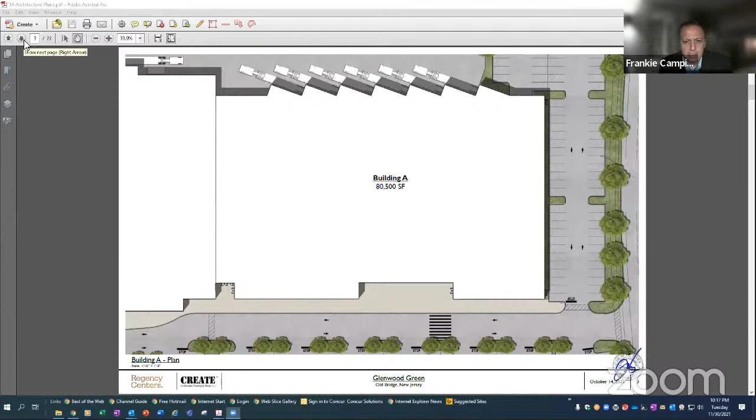On building A, 80,500 square feet. Average height is a 24-foot parapet, with key elements at 28 feet 6 inches and 35 feet 10 inches. It's quite a large building. I don't want anyone to be alarmed by the 35'10" dimension for the key entry element on the left-hand side. To put it in perspective, if you're used to national tenants such as Ross Dress for Less, they are now 38 feet high on a building only a third of this size. So we think we've kept the buildings in check with regard to height and pedestrian scale, but also visibility from across the parking lots.

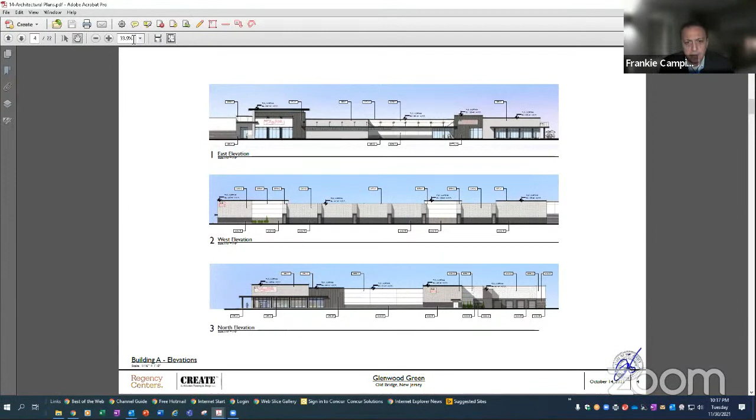Building B is 135,965 square feet. Their average height is 26 feet high, with 30-foot and 36'6" key elements on the left-hand side.

Buildings C, D, and E are all 14,250 square feet, with an average building height of 24 feet and key features ranging from 27 to 30 to 28 feet, but all 3 being different. So while they're the same footprint, the facades have actually been designed differently, as are G, H, and I.

J is the fueling station at 5,000 square feet. Building K is the medical building, 3 stories tall.

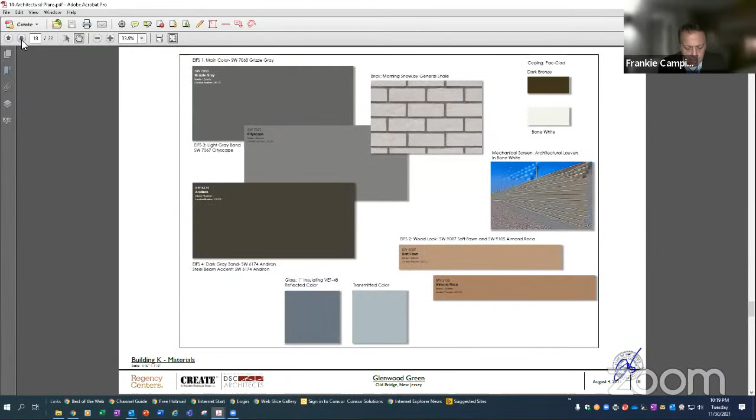Page 18 shows building K's building materials, which are similar to ours. Page 20 also indicates the retail palette color and material variations used throughout the entire project.

If we can go back to some of the building elevations, or if the board would like to remain here at materials, it's okay either way, but I'd like to go back to building C, D, or E. The design of the buildings was meticulously curated, providing a canvas that allows for a system of organization for tenant identities into a cohesive whole. The design provides a uniform character with canopies and signage at uniform heights, but tenants will be permitted, if not encouraged, to vary their signage. We're not looking to have one color backlit red plexiglass sign band like what's prevalent throughout most shopping centers. Instead, we're encouraging tenants to have backer boards, pin letters, building-mounted or canopy-mounted signage, painted fascia signs, and dimensional if not carved letters.

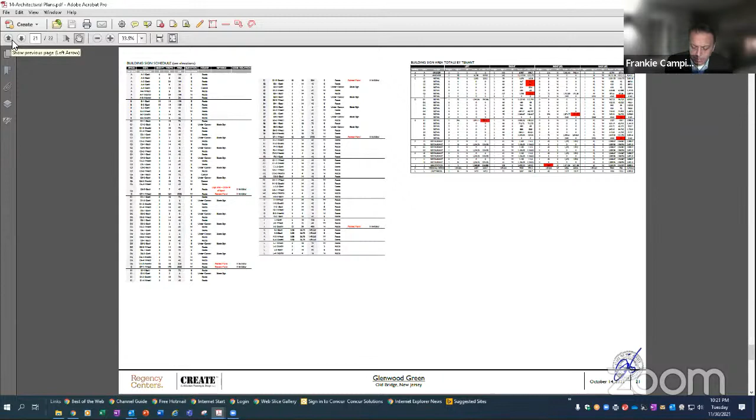On page 22 is the pylon sign that was just mentioned while we were setting up. You'll see that the pylon sign has architectural features that tie into the architecture of the building. Going back to page 21, an elaborate sign study was provided that cross-references building and tenant, but a simpler one was provided by Keith. I don't know how easy that is to pull up, Keith, but you provided a much simpler sign study because we understand the building architecture hasn't been what's been in question thus far. Working with Regency, we've really scrutinized the building architecture itself and had all the tenants conform to a vernacular that I think sets the tone going forward.

What we're trying to do here is work within the rule that, for retail buildings, only one sign per tenant is allowed, with the storefront considered the front. So we understand that all buildings are going to require a sign variance to have multiple signs.

I respectfully want to remind you that if you visit any newer shopping center these days, multiple signs and fascias are really the prevalent look, because what we're trying to create here is four-sided architecture with no backs, in keeping with the successful shopping centers in design right now. This is the way you see buildings articulated on all four sides.

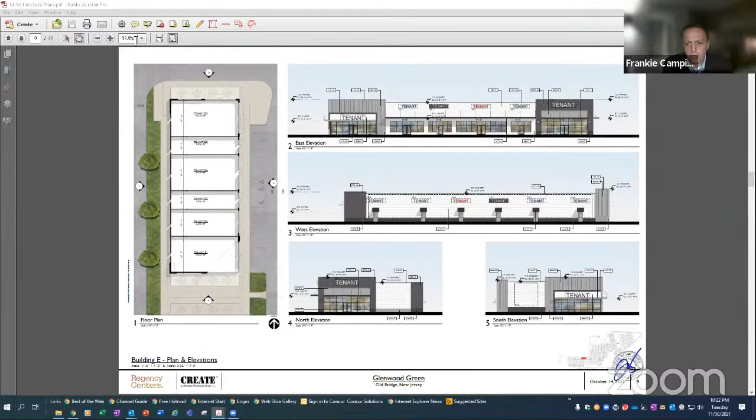There was mention of the inclusion of large-scale wall murals. You can see one of them outlined on the bottom right-hand side on the south elevation. But from an architectural viewpoint, we don't consider the murals signs in the manner that most sign ordinances were originally conceived and written. In our professional opinion, these are wall graphics, they're art, they'll be commissioned or curated. They're not intended to be advertisements or billboards for branding, product, nor the tenants themselves.

This is a cost that's going to be absorbed or subsidized by Regency Centers. They're really meant to be enticing and exciting and enliven the center. I'm sure you've seen them throughout the country in other shopping centers or sides of hotel buildings, sometimes on Instagram. They're great photo opportunities. They beautify the facades, especially when carefully placed.

And so these have been thought about in concert with the designs. When we were coming up with the building facades, they were purposely left such that we could add murals in these locations. We went back and forth with Regency for weeks on end, trying to find locations where these could be included, and they have done this successfully in other centers. We think they will help enliven the shopping center while bringing four-sided architecture to the building.

The majority of the building materials are prevalent throughout. There's brick, there's CMU, there's siding, and of course I'd be a hypocrite if I didn't say there was going to be some EIFS used on the buildings. But what you can see is we've really given the tenants a canvas to work with, so that if they want to add some color, some pop with graphic signs, all of which will be submitted individually when they go for their sign permits to you, the idea has been presented here with backer boards in different colors, sizes, and locations accordingly. That's basically a quick run through months and months of design work with our client.

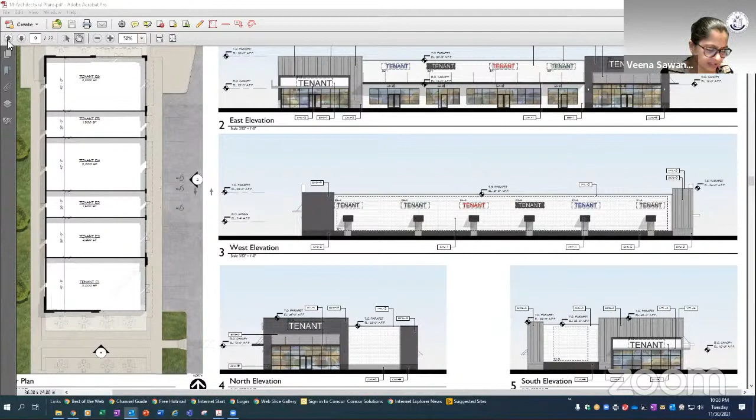And yes, Mr. Campione is right, the way the ordinance is written, only signs that are on the storefront are permitted. So per storefront, one sign is permitted. Everything else requires a variance. For each building, I had a set of questions. Can we quickly go over those so that we know we have addressed them? Freestanding sign, we already covered. Buildings A and B, I think the first one is covered.

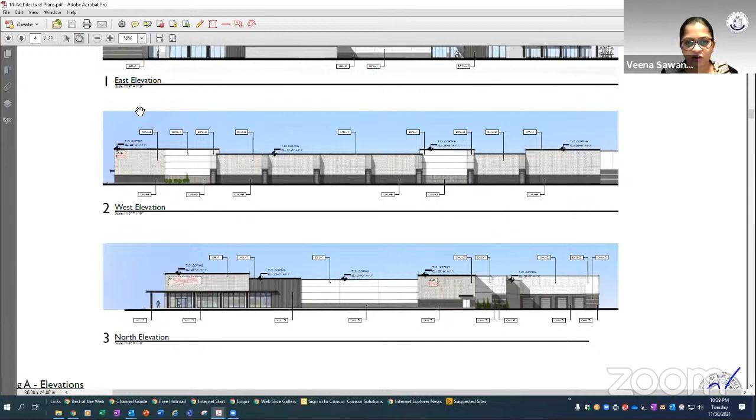Some of these are just minor errors that need to be fixed. Proposed signs B5 and B6 front on the ShopRite village lot, and I had asked why we really need that sign. I'm assuming the applicant is assuming that at some point the adjacent lot will be built and there will be some common access between the two lots, and that sign would be required in that instance. Right now it's vacant, but that doesn't mean it will remain vacant.

B4, again, it's a sign on the rear side of the building, and the question was why do we need that sign? Building C, D, E, I think those are similar comments for most of the signs. Do you have any comments to the questions raised in the memo?

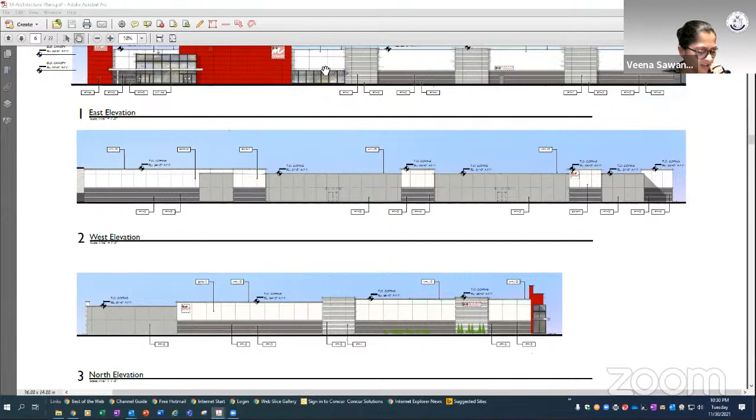Which way should I start? Should I start with them? Let's club them together, building C and D. Well, can we go back to E, the murals? Actually, if we go, I can bring up examples of the murals. Oh yeah, sure. Okay, hold Keith on, you may have to give me control and see if I can.

I stopped. Can you see my screen? Not yet.

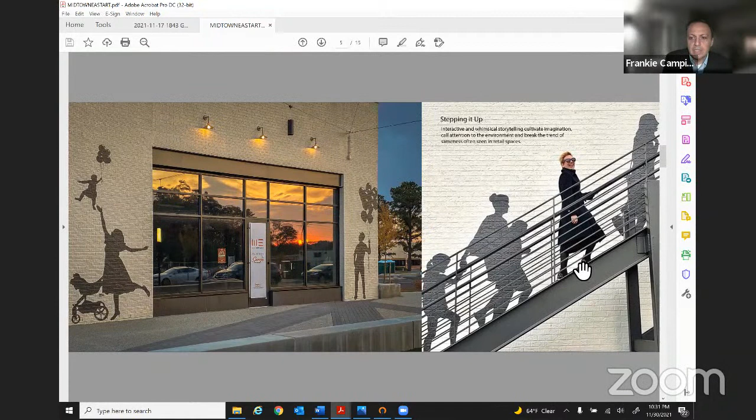To the right, you can see the staircase going up, and it looks like there's a silhouette painted of a family walking up the stairs. And then, as I was mentioning, it's a photo op, because that's a real woman walking up the stairs in between the silhouette of the mural on the wall.

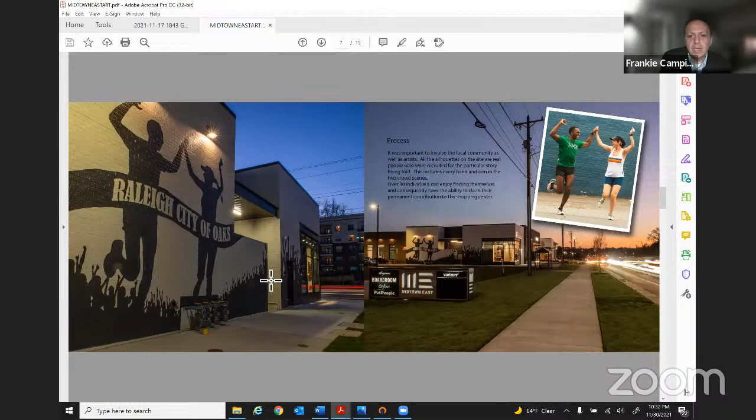This one happens to have a lot of black and white silhouette type work because of the artists they worked with. I don't know if Chris Widmeyer from Regency wants to speak further to this. This was sort of his labor of love, used on the building, but you can see what it could be. There are lots of different ways this could be treated.

We've seen them, I'm sure you've seen the very famous one that's gone viral, with the butterfly wings, and you can stand behind it and you've got the big butterfly wings behind you. But it's curated, right? It's not something we're just going to slap together and throw on the wall, or graffiti art or something like that. Should it be approved, we can work with you on having the artwork approved before it gets implemented on the wall. But you can see the intent is nice work, and well thought out, as opposed to just a graphic or a Coca-Cola billboard or something like that.

Sure, thank you so much for sharing this. I would recommend to the board, they're really tastefully done. I would recommend that should the board act favorably on it, the applicant works with us to finalize them. But obviously the pictures give you an idea as to what we would be seeing on the rear side of the building.

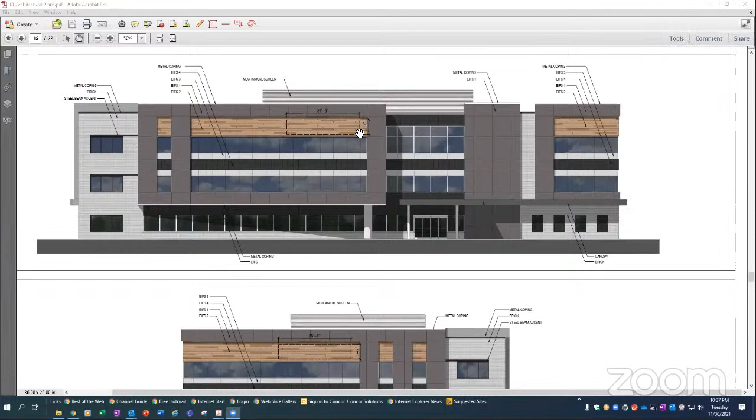So they've got their corporate identity located on 3 of 4 sides of their building because they have visibility from all 3 sides.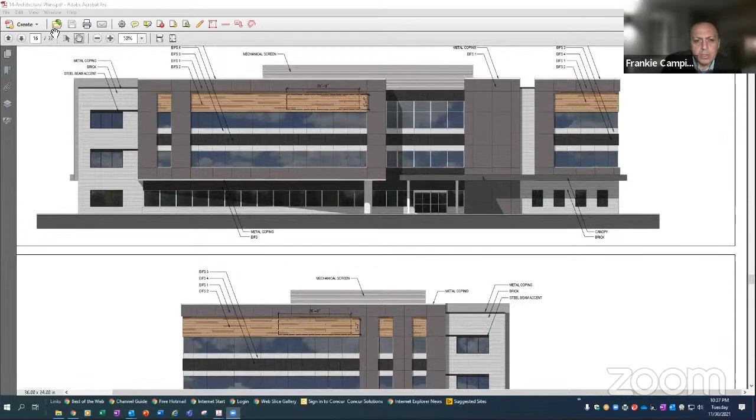If you scroll back to the site plan on page 2... you know, I didn't get to this one faster.

Mr. Campione, since we are on this page - so, not unlike building L and all the freestanding buildings, they are 4-sided architecture with no backs, with visibility predominantly from 4 sides. That's why they're going for the graphic.

And since we are on this page, I believe I had brought this up in one of the meetings - for the freestanding sign, the one at the bottom, if you can scroll down slightly, yes. Generally, when you have these posts, we would consider them pole signs. My recommendation was to fill up the base so it is one large monument sign, and I believe the applicant had agreed to adding the base.

So did something change? Actually, we did - that's the difference between the set from October and the one from November. Okay, we could bring that up and submit that as an exhibit now if you like. Yeah, it's a good idea. Sure, give me a second.

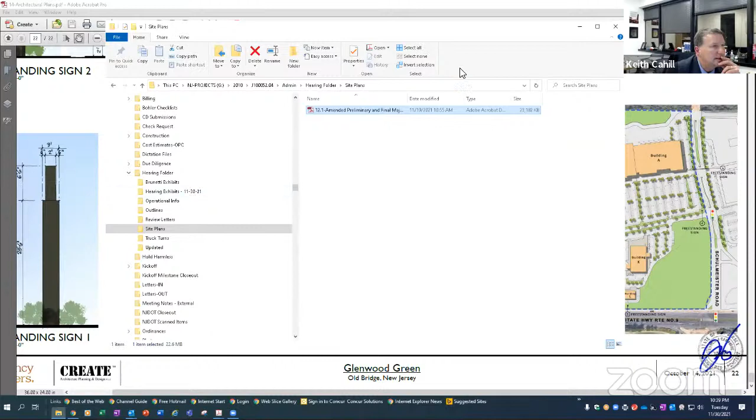We could just identify the last page, dated with the November date being submitted, as Exhibit A5.

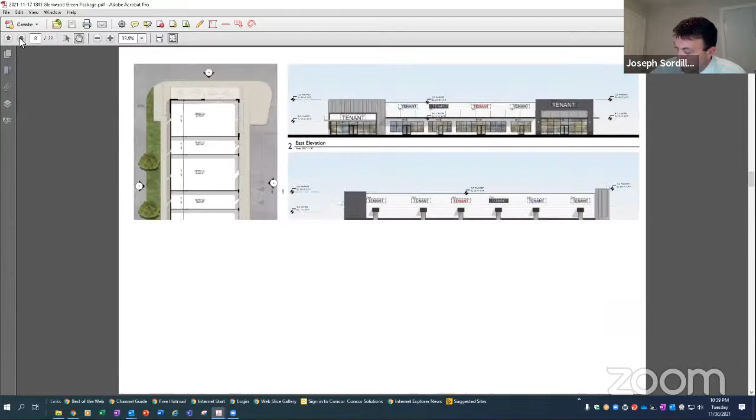Hope I didn't make anybody sick.

Right, so if you zoom in there for me, Keith, you can see that we have filled in that space on all the proposed signs now. And this is a concrete base, with landscaping in front of it. Correct - same with all of them.

Perfect. And I had a question related to the gas station sign - that it will advertise only for the convenience store and gas station, not any other tenants. Not that it's an issue, but the way I evaluated the signs is that you need one sign per frontage. You're allowed one secondary sign, but this gas station sign is required because it's a gas station - a gas station is allowed a separate sign of its own. So just to make sure we have the right variances covered, I raised that question, and I know Keith had mentioned this will not advertise any other tenant but the gas station and convenience store. Is that correct? Yep, that's what you can see in this elevation.

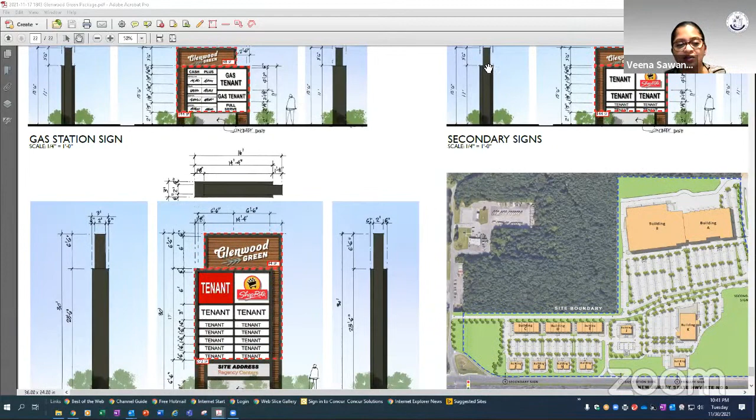On the pylon sign, is there any lighting? Is that indirect lighting, or what is being proposed here?

The tenant panels would be illuminated from behind, so they would glow like a typical tenant panel. The Glenwood Green sign, we have yet to work out those details, whether they would be face illuminated or halo illuminated from the back.

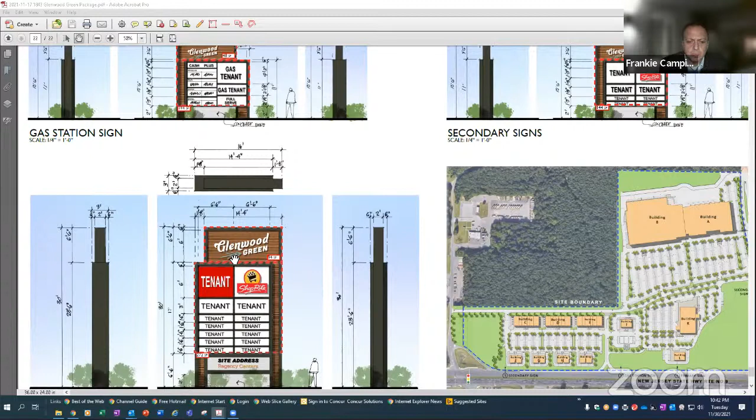What about the fascia signs on the buildings? On the buildings, it's the intent to allow the tenants to get creative with them. We don't want to set a tenant criteria where everyone's just a backlit channel letter, red plexi type thing. So what we're identifying now on the elevations, without actually identifying tenant names, is showing that they could be different.

If you see the tenant on the left, he's within his sign area on the actual canopy. You can see on the left side the pin letters are sticking up from the canopy itself. Move one tenant to the right, and if you move your cursor to the left, you can see the side elevation - the letters are actually pinned up right there, exactly.

Then when you move to tenants further to the right, they could be backlit channel letters, they could be pinned off the building, they could be on a backer board. We would like the tenants to get creative with the canvas backdrop that we've given them.

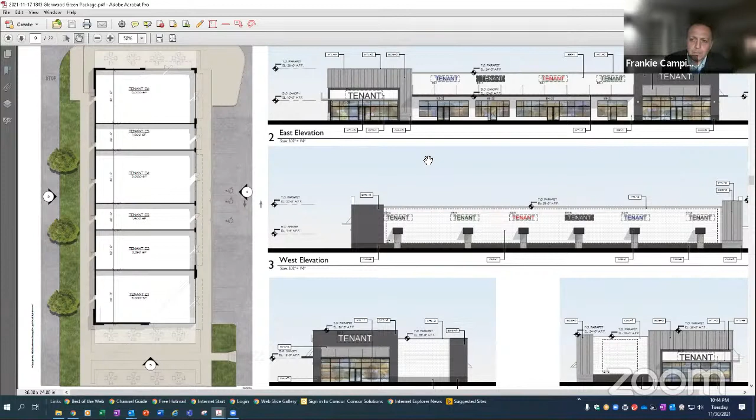I would like to revisit this part on my end with Rakesh as well, because I don't want it to be a free fall either. There has to be some sort of scheme or design flow to the lighting or the type of signs. It's good that we have the sign area already marked up, but with lighting too, I want to revisit it, and maybe I'll come back with a comment in front of the board at the next meeting. Rakesh and I can discuss this further.

In mall work, we call it a tenant criteria when we're doing large malls or outlet centers. Would that be something we could work on with you before the next meeting, to develop a one or two page sign criteria that starts to set that tone? Yeah, sure.

I don't want to speak for my client, but having worked with them for so many years, I'm assuming they would wind up developing something like that anyway as part of their lease documents for tenants, to promote that creativity we're talking about. So all we're doing is accelerating that slightly and getting it done now.

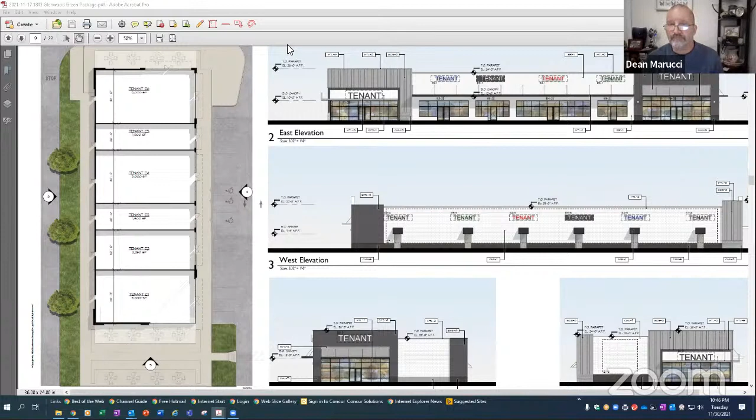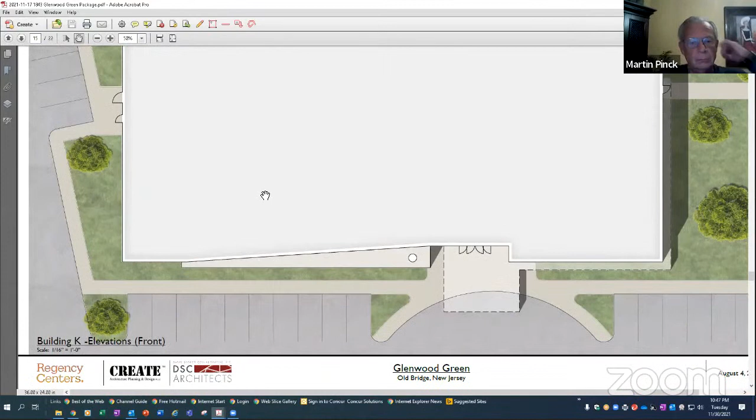Mr. Chairman, I have one comment, just scrubbing slide 15. When you look at building K from a building elevation standpoint, plan view, on the west side, we see two doors. Although you may need them from a means of egress - go back to slide 15 - on the west side, you see the two doors on the left of the drawing.

Slide 15, you got it right there. You see those 2 doors that are drawn in? All right, now go to either slide 16 or 17. What you essentially have is the front and the rear. You've got 2 sets of double doors on the front and on the back, and on the side you have a single door on each side. So it appears it's just a minor scrub.

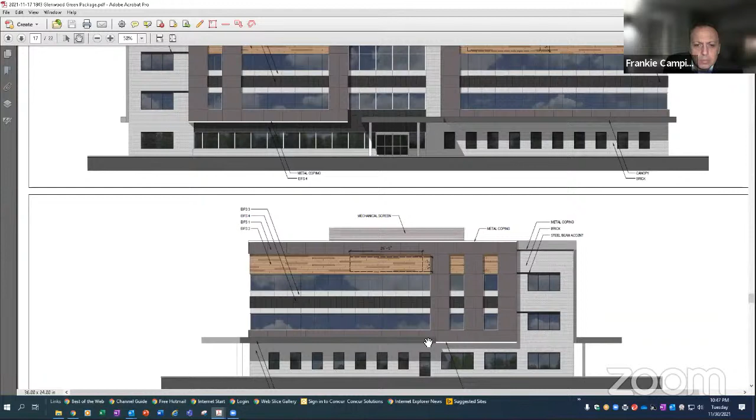Understood. Although you illustrated 2 doors on that side, they're not actually 2 doors there. Although from a means of egress you may need it. Obviously you can't confirm that without seeing it. I'll confirm with the tenant prior to the next meeting, which is correct. If they're looking for a man door and a service door, or if the elevations are correct, then it's only 1 door.

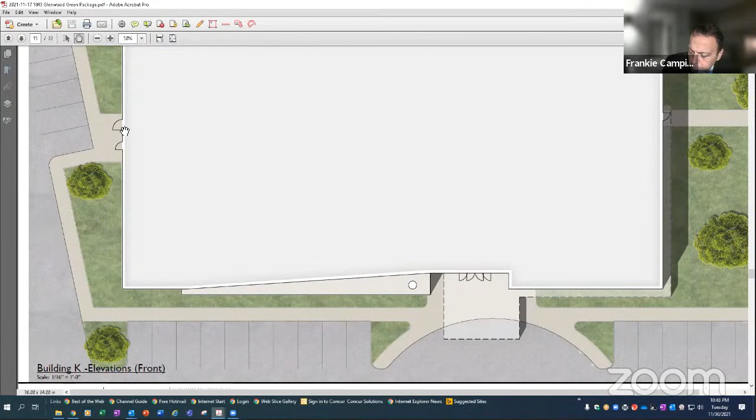That's correct. And if it is the 2 doors, they would be on the opposite side where the gen set is, which is the east side. Okay, we will, I'll use your term, we'll scrub that and clarify.

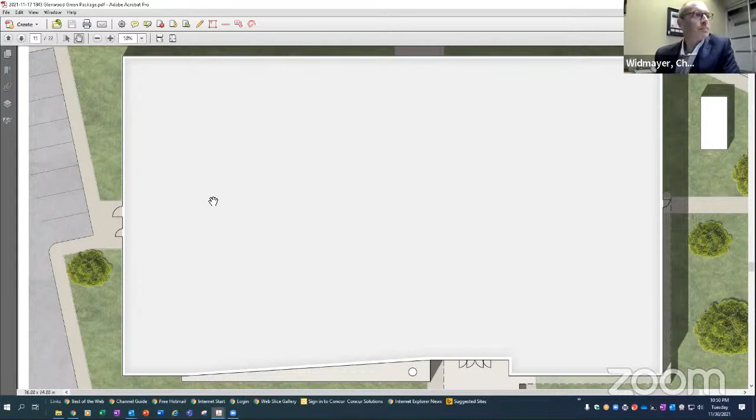And you had mentioned that you're willing to work with the township with the first round of artwork. In the future, would the client be willing to work with us, reviewing everything before they changed it? I don't know, I don't see why not. So unless our client speaks up against that, I don't think there would be an objection to that being a condition. That's fine, on behalf of the applicant that request is fine. Thank you. Yeah, I think there needs to be some oversight whenever any revisions need to be made or requested to be made.